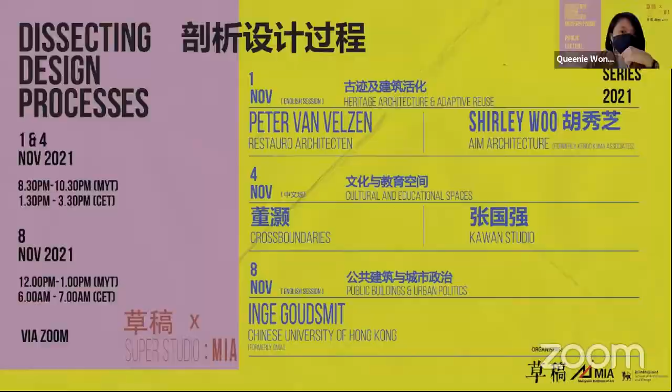This public lecture series is brought to you by Malaysian Institute of Art and Draf. Malaysian Institute of Art is a non-profit making organization, and we at the Interior Design Department offer the Bachelor of Arts Interior Architecture and Design program, with the syllabus adopted from our partner university, Birmingham City University. We aim to provide students with the skills to transform or give life to new spaces. For example, this semester in our studio, our students have to work on an existing warehouse, Kongsi KL, and transform it into a performing arts space.

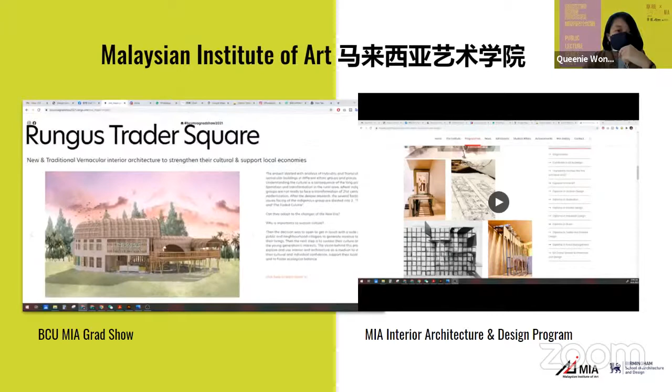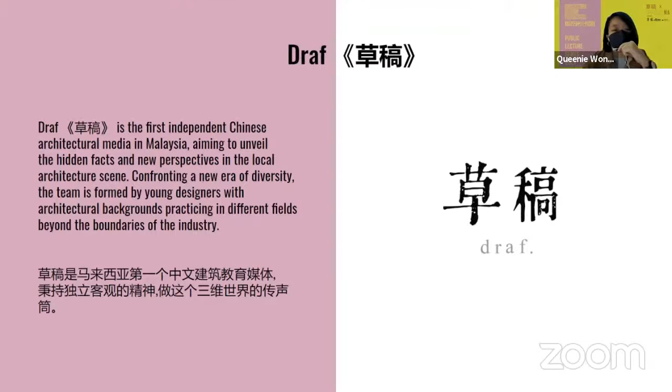We also have Draf, which calls itself the first independent Chinese architectural media in Malaysia. Among other things, including events and activities or public lecture series like this one, Draf is also going to publish their first publication. The debut issue will be titled Tatsulai, which means stepping out. It covers topics including how architects step out of the boundaries of their discipline into different disciplines to address issues like the pandemic or the climate crisis, etc. It also covers how people step out into the public realm to voice their concerns, and how communities step out into the communal realm to organize spaces by themselves. If you're interested in what Draf is doing, you can log on to their website, which will also be in the chat box, to check out their events, the content of the debut issue, and also place your order on the website.

Moving on to the title of our public lecture series, the reason why we are fascinated by the design process is because we think we are being more and more exposed to fragmented information about architecture on the internet. So we hope that through this lecture series, we can shift the spotlight from picture-perfect outcomes to the exploration and experimentation that led to the decision-making process behind the creation of our built environment.

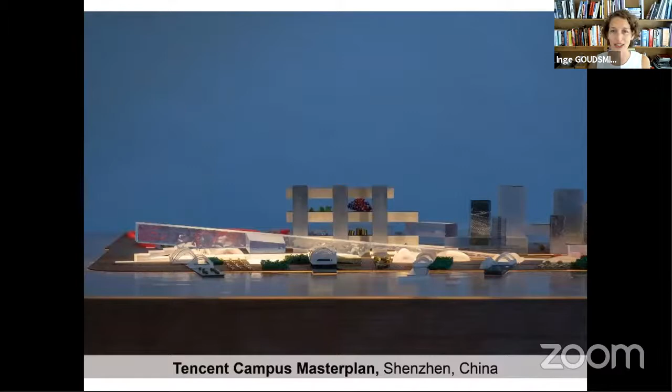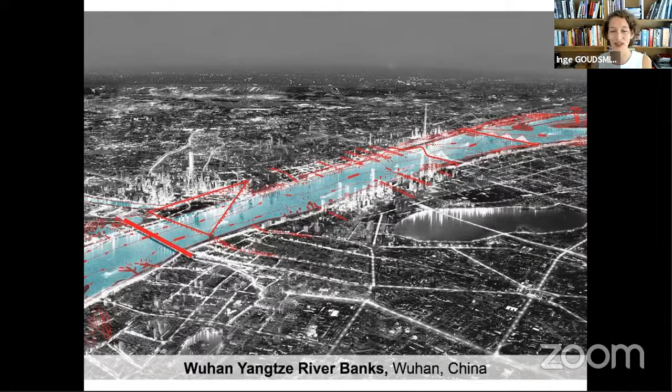I also worked on the Taipei Performing Arts Center as a key project, but other projects include the renovation of the Ullens Center for Contemporary Art in Beijing, one of the major art centers, and a master plan for Tencent for 80,000 staff and 20,000 residents here in Shenzhen. Unicorn Island, also another master plan in Chengdu. The riverbanks of the Wuhan Yangtze River, before the whole COVID thing happened - I actually went there quite a few times.

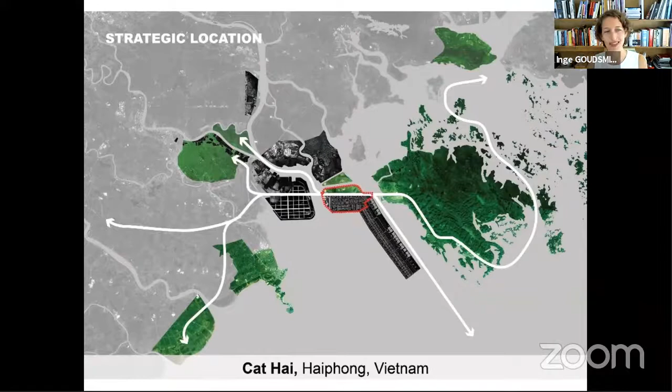Projects in Vietnam too. I was very interested in the politics around these projects, also in the design of course, but also how much you need to know as an architect to make these projects happen, which is in fact much more than good design. Good design is essential, but there's so much politics, especially in larger master plans, which is why I enjoyed master plans a lot. That's the reason I started teaching, and here I teach the Urban Politics Studio, where we try to address these kinds of issues - looking at much more than design. That has led so far to quite a few very interesting results, which you're welcome to check on our website, currently being updated.

Again, Taipei Performing Arts Center - let's talk about that project today. What I will show you is quite a range of slides. I have quite a few.

Because the project has been, we started the competition in 2009, or won the competition in 2009 I should say, and since then a lot has happened. So now we're about to complete it with quite a few years of delay that I had never expected it would take so long. So I want to show you a bit of the design and a bit of the current state, and I've thrown in a few special moments about the more interior part of the design, because I know a lot of you are potentially also interested in that.

So let me start with the site area. Can you see my mouse if I move it like this? So this is actually the site area, which is the metro line, the Jiantan station. It's in the north of Taipei in the Shilin area.

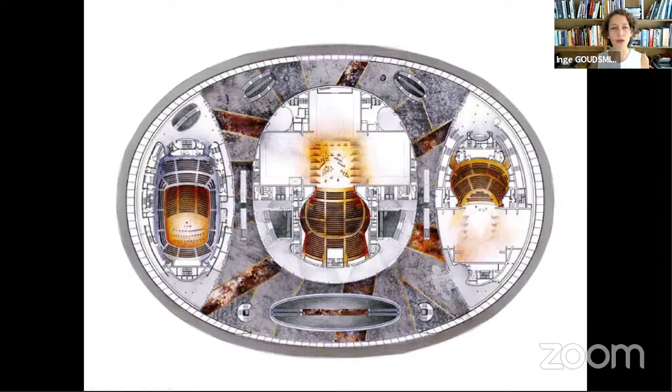So we thought, if we have those three theaters, we should really try to benefit as much as we can from that combination of theaters, which is quite an exciting program. So we took reference to this hot pot, a Taiwanese hot pot, as a diagram of consolidation and efficiency, where three dishes are cooked in one pot. Can we, with our program of three theaters, combine and be highly efficient about this space?

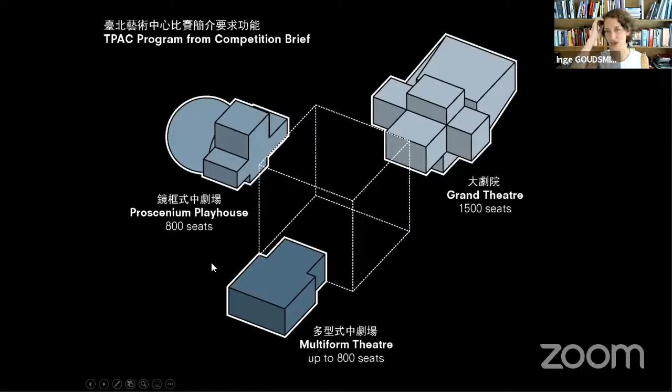So this is the program brief: three different theaters. The Grand Theater with 1,500 seats, a proscenium playhouse with 800 seats, and a multiform theater with another 800 seats maximum. We consolidated those three theaters basically into a sort of stage tower, which is a very efficient back of house tower. Then those volumes that are sticking out of the cube are the auditoriums.

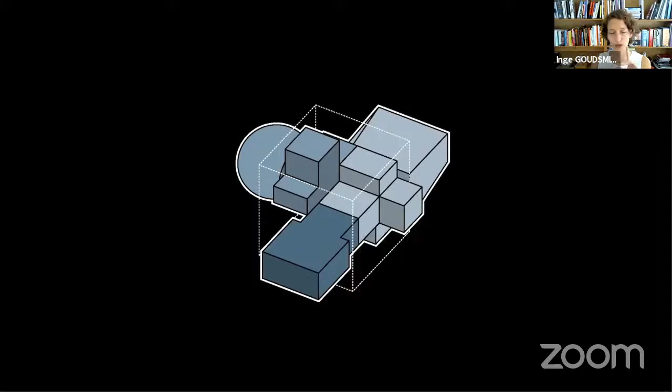With this, we tried to create much higher value and also flexibility, and we tried to reduce the redundancy of those multiple back of house areas, and in fact multiple front of house areas, because this way you can combine the entrance area to the theater. So it results in a very compact theater that also leaves as much space on the ground as possible. I'll tell you a little bit more about that in a minute. So this is then that image.

So this cube, we wanted to make it a very highly visual cube where you can see through, see the machine in operation, and then those auditorium volumes that are really a bit mysterious, where you cannot understand what's happening inside. So it looks very different from most theaters, which are usually quite opaque volumes.

We think that life on the site is actually really exciting. The government occasionally thinks otherwise, because they're concerned about dirt and messiness, so they'd like to control the food market and those vendors better. But I won't tell you too much about that today, that's not the topic. I'm quite interested in the combination between the local culture, which is really very strong, and the high culture implemented as a global icon placed in this local neighborhood, and how these two areas clash.

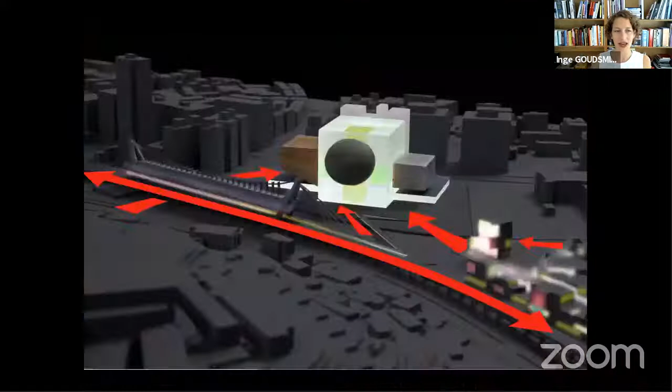So what we try to do is open up the site in order to connect to and give space to this local culture. That's why we lifted up the building. As I mentioned, initially we had a food market, this wider lower strip. But unfortunately this was taken away by the government after a couple of months into our design exercise, because they had fears about managing dirt and smell into the theater, and the combination of high culture and local culture which they thought was quite difficult to match.

This has been a struggle throughout, which is actually part of the PhD I'm working on, looking into that kind of struggle. Nevertheless, by reducing the site area as much as possible, there will be a lot of area for other activities, whether related to theater or food, we'll have to see. Eventually, as architects, we don't have control over that.

So definitely it will be a new attractor in this very dense urban energy, attracting probably different kinds of people. Everybody hopes it will help save the night market once tourists come back, because the night market is really in a very poor state because of COVID and also some other problems they had even before.

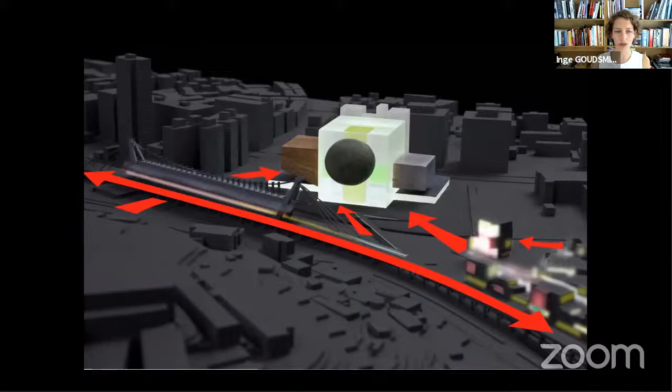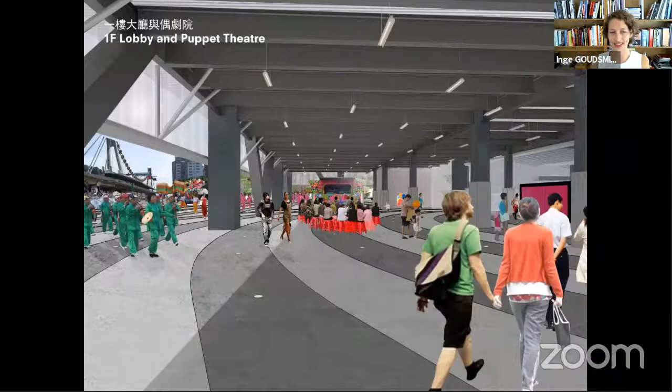And also here, these areas are where the auditoriums are protruding. So there's a lot of shaded, covered area of the site that is yet part of the realm of the theater. And then at some point you go inside the theater, which should potentially be open the entire day, so accessible for anybody.

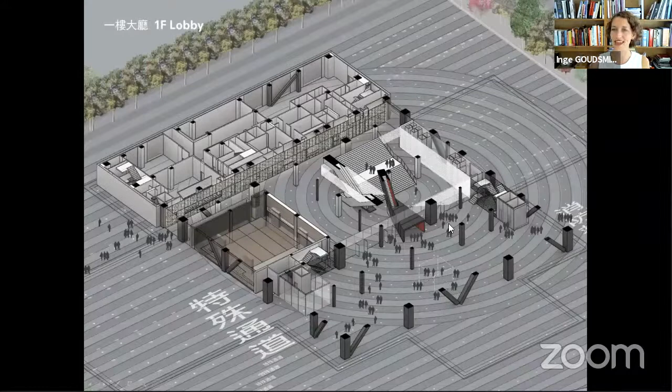And at some point you start to go up into the theater with this kind of big staircase. Step by step you enter into the realm of the theater, and the materials also get more and more advanced.

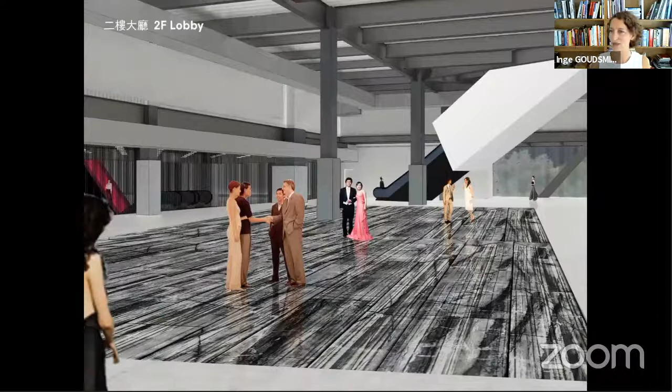So this is the second floor, which is the main lobby, mostly used for visitors. This is probably not a ticketed area necessarily, but an area general visitors won't visit much because it's simply a sort of pass-through type of space.

And then from that lobby, you basically start entering. This is the picture I showed just now, and you start entering the different theaters. So it's really the main zone before you start going up to the theater.

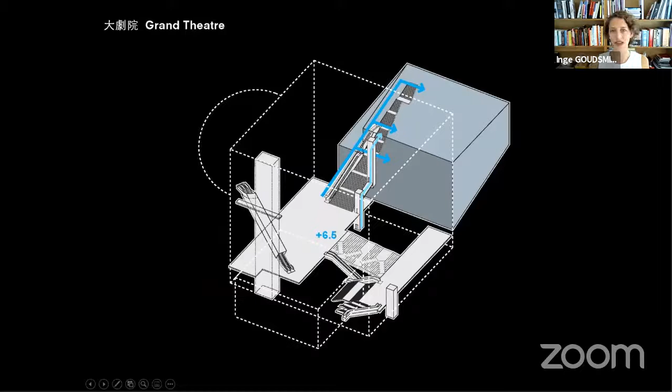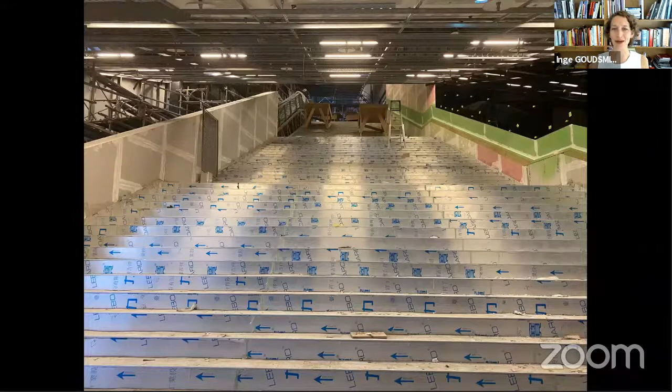The first one is the Grand Theater, the largest with 1,500 seats, where you enter via this staircase. Rem Koolhaas, during a site visit, once mentioned this must be the longest staircase in the history of architecture, or at least it should have that effect, because it tapers all the way up, becoming narrower and narrower, until eventually you have a very, very small slit.

Of course, you don't only have to walk—there are also escalators taking you up, and at the end of the show, taking you down. But it's quite an expressive, interesting space.

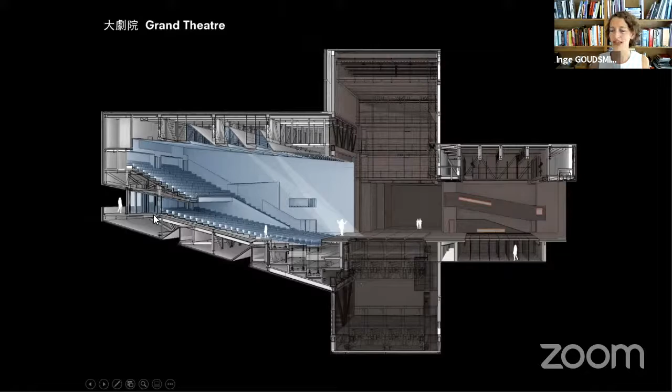The interior of that Grand Theater has basically two floors, and one of the floors is connected—because we didn't want to have two separate balconies and a main floor, but by creating that combination we ensured the two levels are really connected to each other. Here you see the section, and it makes it into a very intimate feeling, so even though it's 1,500 seats, you still feel very close to the stage.

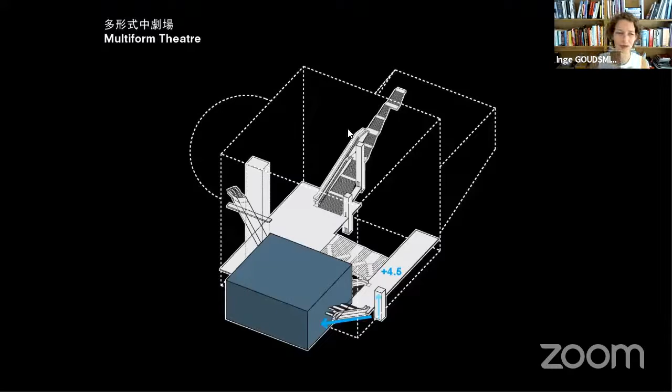But first, the multiform theater, which is on the other side of the cube. This is a multiform theater, meaning there are a lot of different configurations possible. You see the interior of the theater with the technical grid at the top and a functional space with some understage underneath.

But then you see this space, which is the lobby. Initially our lobby was only here, and we didn't include this space underneath, which was the realm of the MEP engineers at the time. But then we realized they didn't quite need all that space, and that we could take some of it back, benefiting from a slightly larger lobby for this multiform theater.

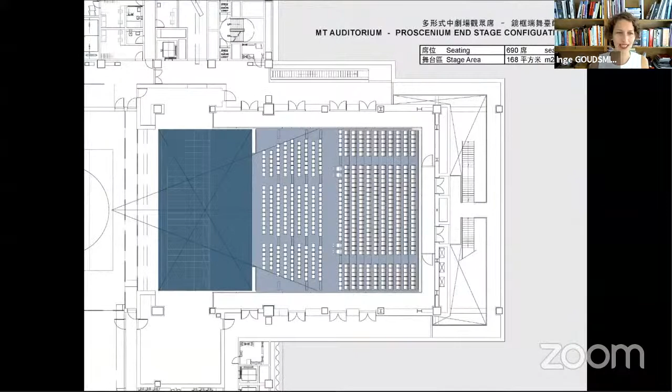This is the plan with some different configurations, and the current situation where the theater is blue, but a different tone of blue, a darker color, because for the multiform theater the client wanted it darker, to make it slightly more similar to a black box.

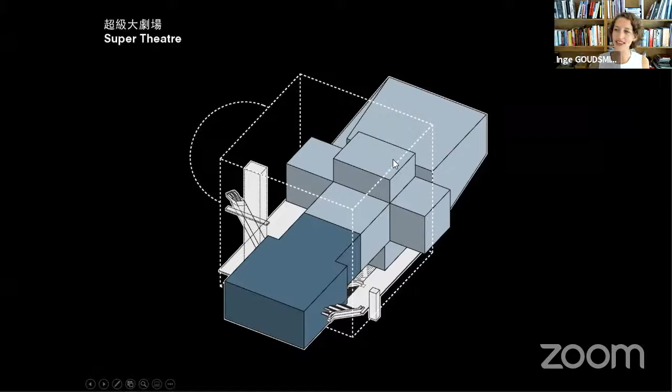There's a big story about that, and I'll show you one slide later to go into more detail. But most interesting about these two theaters is that we can actually combine them. Sometimes I call this '1 and 1 is 3.' So instead of two separate theaters, this would be the grand theater realm with a stage tower, understage, auditorium, backstage, and main stage.

And this would be the multiform theater. But we can combine those stages together and create a 100-meter long area from this side all the way to that side, in which you can imagine completely new types of performances. As I know you guys are also designing a theater, this could be very interesting to consider, how you can create something new rather than a conventional theater.

We sometimes show the reference of the opera Die Soldaten, which needs a lot of space and can currently only be performed in factory halls. But we also thought it was interesting to address different types of shows. Honestly, in Taiwan there's a very high level of theater, very high quality, so it was interesting for us to address that interest.

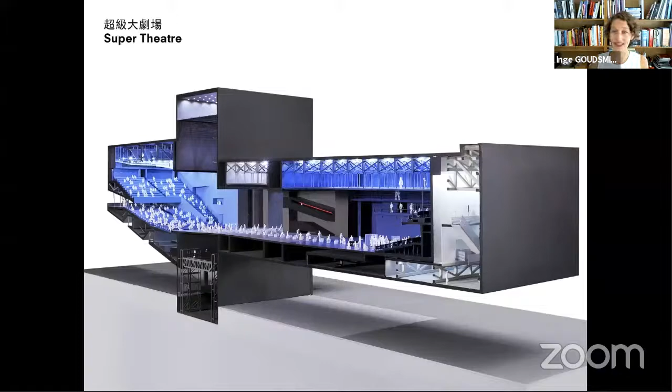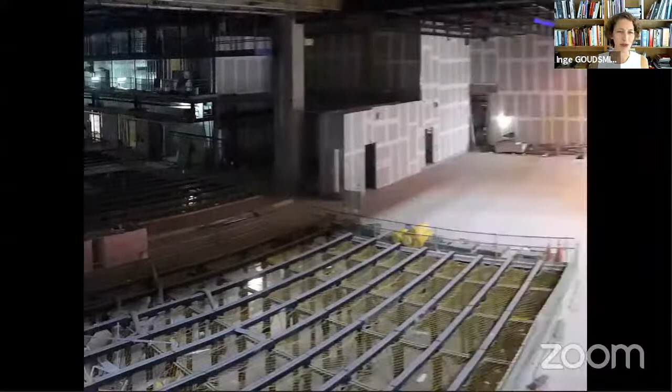So this is a few views of how that space works. Here you see from the multiform theater, the backstages, and then all the way to the grand theater, that 100-meter long space under construction, which sometimes we feel we should not build any walls anymore because it's so exciting to have that empty space rather than full spaces.

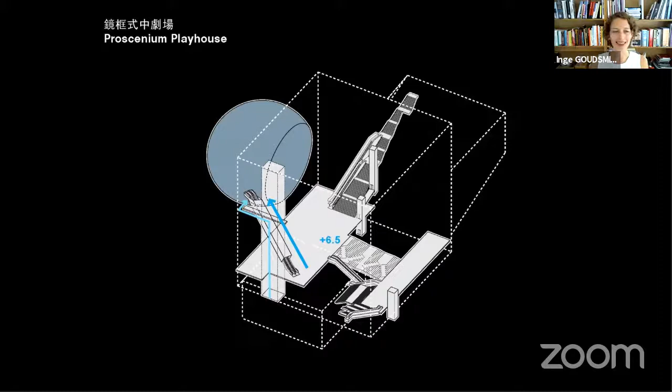The last theater, Proscenium Playhouse, is the big ball, as most people understand it. Again, you enter from that lobby area into basically a big tube by long escalators. In reality, these escalators look much better than in the renders. You must realize the renders are about 10 years old, and 10 years ago the quality was just a little bit different.

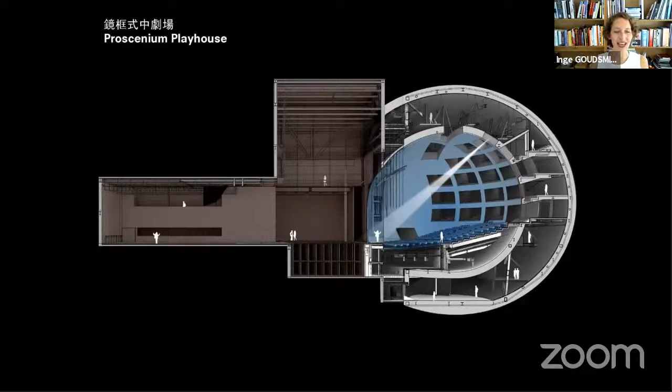That's something we didn't realize at the time, but looking back, some of them look a little bit boring, right? So here you see the section through that space, the interior ball, and then an exterior ball. In between those two volumes, you have the moment where that entails the lobby at the bottom and the circulation spaces where you move to your seats in the different boxes on higher levels.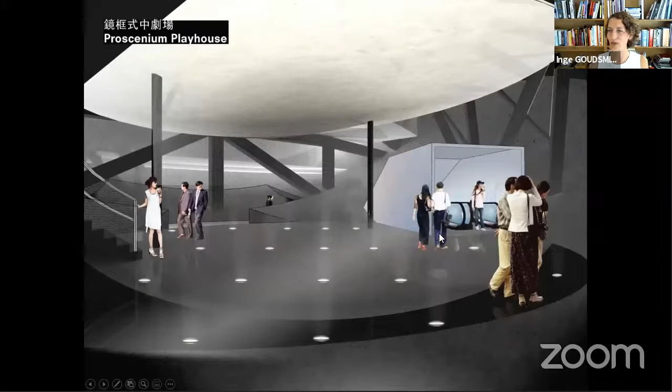So this is that lobby area where this is where the tube comes out. This is the actual situation where you see the underbelly, the soffit of the auditorium. It's a really sexy space—you don't quite understand how it works when you stand inside, but it's an inviting space to walk up those big staircases.

And this is how you circulate. Some work still needs to be done in those spaces, but it will always be quite dark because there's no daylight until you eventually enter the theater.

So this is the theater plan with 800 seats, a render, and the current existing situation. And at some point we started unpacking those seats. We built the proscenium also as a circular opening, for which we had to fight a lot.

It's not a standard proscenium. We're actually designing special curtains to match this proscenium, so we can really play it out and make the most of it. Here, those black areas are the official proscenium opening that can open up in different ways. I'm not sure if you guys have a proscenium theater inside your stage, but this is a reference to understand it.

And you see here the seats are finally uncovered, and another view from one of the boxes. The seats we actually designed from scratch. These are just 16 of the design versions—we had many, many more.

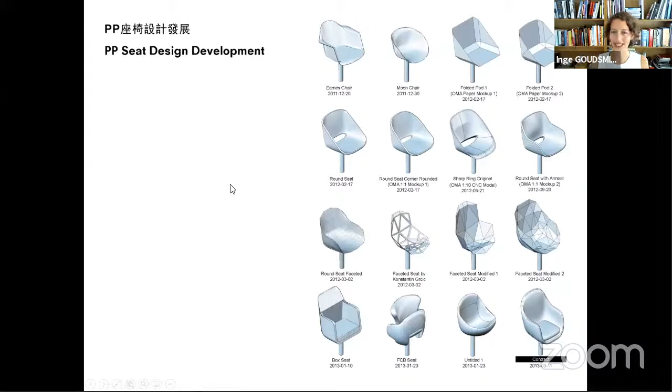We discovered through this very long process that we needed a sliding mechanism because we didn't want a folding seat—otherwise you don't have enough egress width for fire safety, etc. A theater is a very highly technical space.

Eventually we were very happy that these seats are there. I must say they are actually quite comfortable, more so for Asian people who tend to be slightly less wide than some Westerners, because they are not extremely wide—but this was really the max we could do in so many different ways. It was a really exciting experience to work with those seats.

Something about the material—you must have noticed that all the theaters are completely blue. This picture was actually one of the references we used. We thought it was really exciting that this boat, by Xavier Veilhan, is entirely blue except for a few very technical things that are either black or white. Everything about it is blue, of course, so we thought this could be very exciting.

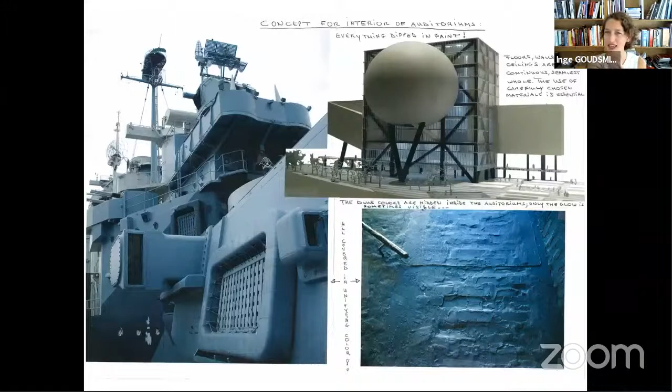We started looking for references—marine boats and submarines that have a similar quality, but also this layer of material. Instead of using a top layer, we really tried to have the idea of everything coated in a very thick coating of the same color. Initially we proposed 3 different colors for the 3 different theaters, 3 different shades, and also different textures that we wanted to explore.

From a very lush look in the Grand Theater, to the Ball Theater with this kind of thick coat that could be applied on the ball, and eventually a darker color for the MT, the multiform theater. We did a lot of tests.

Some of the colors were too desaturated, some were too innocent, some were too political—which, if you know a little bit about Taiwan, is extremely important. Then we had a lot of discussions with our client and the theater performers, who were very afraid that this color would be too light or too dark, too innocent or too political, or something else.

So we had to actually make a mock-up in one of the local theaters in Taipei, where I literally traveled from Hong Kong with about 800 meters of fabric that we installed in the theater. We held an event and invited the entire theater elite of Taiwan, and eventually the colors were approved, to our big happiness. But it was a very long process.

So again, I mentioned urban politics—you can design something, you can come up with something, that's one thing, but to actually make it work is a whole different thing. Even down to the color, as I wanted to show, things can be extremely political.

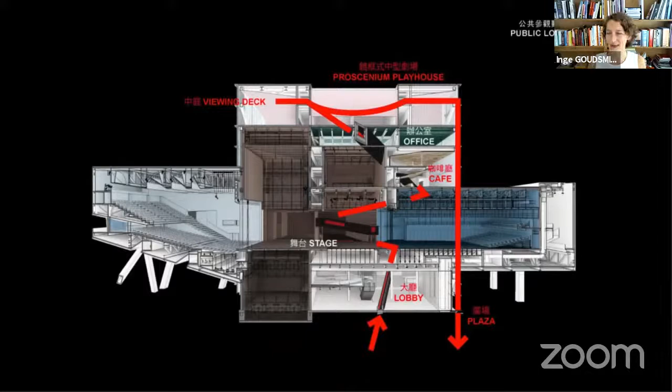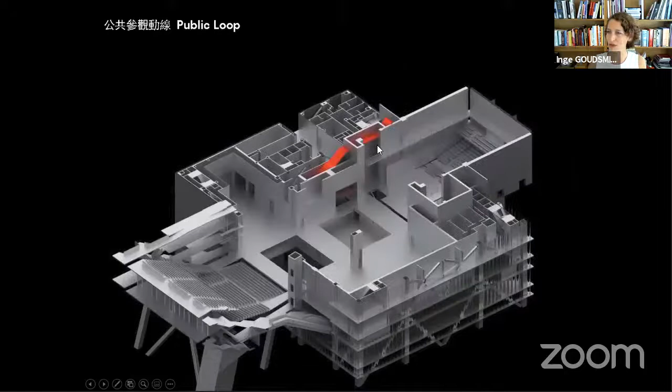So we managed to find space through the nooks and crannies of the building, starting from the lobby with its own entrance from outside, separate from the theater, going up behind the back-of-house areas, peeking into some of the stage areas, and into the technical grid of the multiform theater, further up through the offices, through a courtyard, and to this public space that is a viewing deck accessible to everybody. It's a great outdoor space with a beautiful view.

A last view through the proscenium playhouse where you can see onto the stage, and then you would go back by elevator from here. Again, this is the render, and fortunately, the real situation is much more exciting than that.

Of course it's still in process, but it's a really exciting space. I was talking recently to a local social activist who had her doubts about the application of this building and how well it would suit local people. But she called this space - she had picked up on it already - she said there's this tiny alley that really reminds me of the local alleys of Taipei's back-of-house spaces, Taipei's little alleys.

And she called it the tiny alley that goes through the entire corridor. I really hope that this will be a space opened to the public, not only used for guided tours, hopefully also not paid. But of course the client is eventually in charge, and as architects we can come up with ideas and propose things, and then we need to see how things work out and if it works at all.

So this is the big public loop escalator that goes through the auditorium, and this is basically an image that we made very early on, where we wanted to have that view of the back-of-house areas, where you can sort of see what's happening.

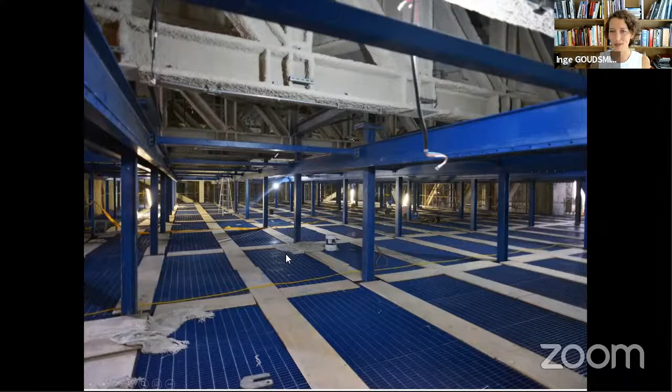This is the view to the MT technical grid - a space that most people have never seen before in their lives, right?

Then the public loop leads up to this cafe on the 7th floor. The cafe is open to visitors, to everybody in the public loop, but also to the theater performers and to the people who work in the building - which is actually a very large amount of people, often forgotten. If you think of theater, you think of performers and audience, but there are hundreds of people who work in the building and can also have their lunch here.

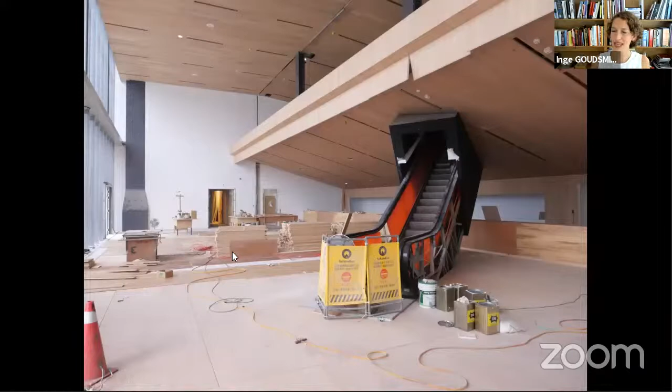So we really hope this will be a space where people can meet formally or informally. This is the interior as it is at the current stage. There's a large terrace that you can also access, and again, the planting is in progress.

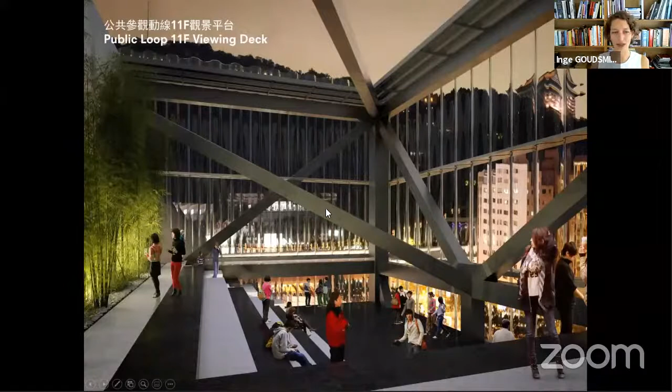And this is then that viewing deck that I mentioned earlier, all the way on top. Again, the current image looks a little bit better than the render, fortunately. It's a very exciting space that also has a lot of structure that we needed to accommodate.

And then there's this view of the Grand Hotel, which is really one of the major touristic spaces or important cultural spaces in this area, and can only be seen from a certain height. So we're quite excited that you can actually have this view. To be really honest, we did not know that we would have this view - we always photoshopped it into the initial renders.

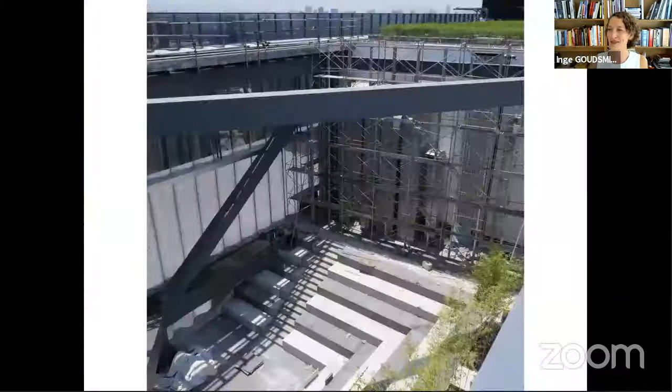You see it here, but we had no clue from which angle you would see it. So we were very happy once the space was stopped out that we could actually see the hotel. It was a big luck in a way. Sometimes you have to have some luck.

And this is the view from the public loop, the viewing deck, into the Performing Arts Center, the big ball into that space. And here is the current situation.

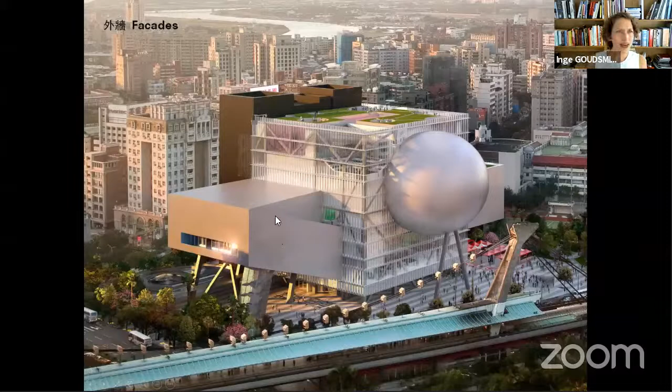Do I still have time to talk? Maybe I quickly go through a few facade slides. Yep, there's time. Yeah, okay.

Facades are, of course, a project in and of itself, like the chairs were that, and the interiors were that. We have basically three major types of facades: the glass cube, which we wanted to show what is happening inside the technical building, then aluminum facades on the auditoriums, and the back-of-house west towers that have a lot of back-of-house areas.

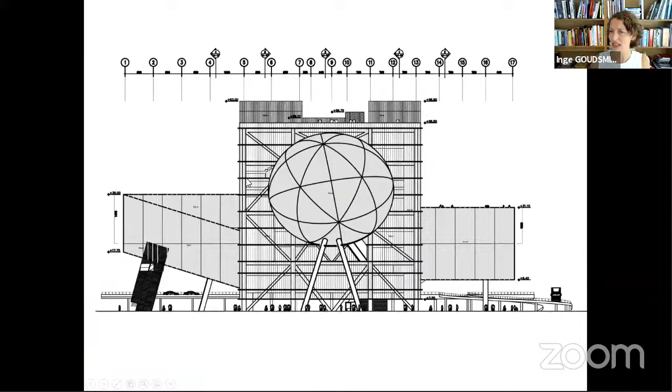These are mock-ups, and Queenie asked me if I could show some of the mock-ups. Well, these mock-ups are almost complete buildings, right? They have their own drawing set, and they're extremely large, I think 50 meters high or something, where we tested all the essential points of the different facades.

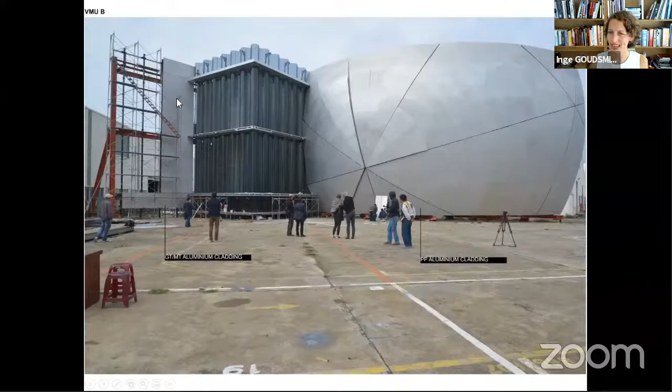So of course we had to test the ball, and especially how the joints would come together, the glass facade, and also how the ball and the glass facade connect, and then the straight flat aluminum facade. We had numerous meetings.

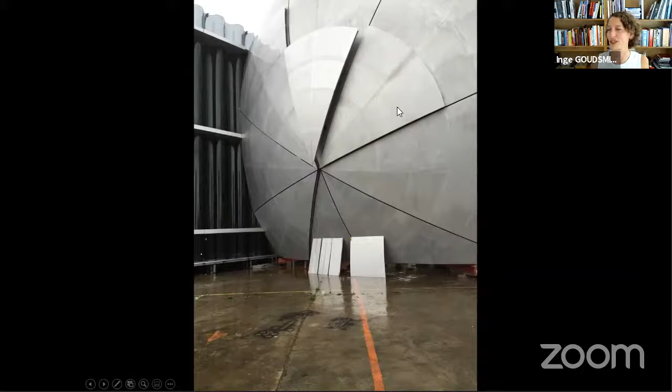This was on a different site somewhere far away, where we had an endless amount of tests. We had fire people coming in to make the building wet so we could see it. We had to come in sunny weather so we could see if it would shine too much. We had maybe 8 different versions because we constantly didn't approve on the different joints, etc. So it was a huge technical process, but eventually it paid off.

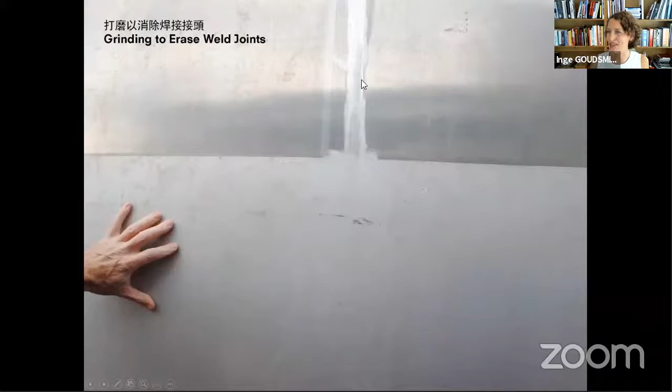And these are some of the mock-up pictures. We had to decide whether it's shiny or matte, how exactly we grind the welds, etc. I won't go into too much detail.

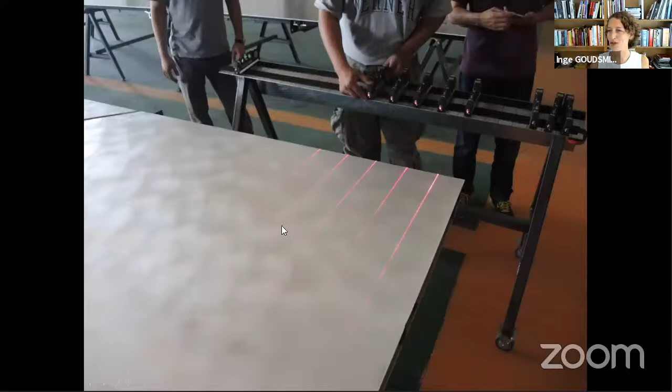Eventually the flat panels were all hand grinded, as you see here, literally people with hand grinding machines that made these patterns, because we wanted to make them as lively as possible. Unlike, for example, the Apple facades that are very, very matte, very constant, we wanted to create this kind of life. So here you see the hand grinding of all those machines in a particular pattern. We had to educate those craftsmen to actually do it in the way that we envisioned it.

So this is a view of the theater itself. What we did not expect was that halfway through the construction of this ball, our contractor went bankrupt and the site was closed for 2 years. Now you can imagine that had an enormous impact and was actually really scary for us.

This is something you can never envision. You can design perfectly, but I remember we said, well, it's a difficult process, but they just need to do their best. And then your site closes for 2 years, and just doing your best is no longer an option, because nobody is getting paid. So those were hard times for the theater.

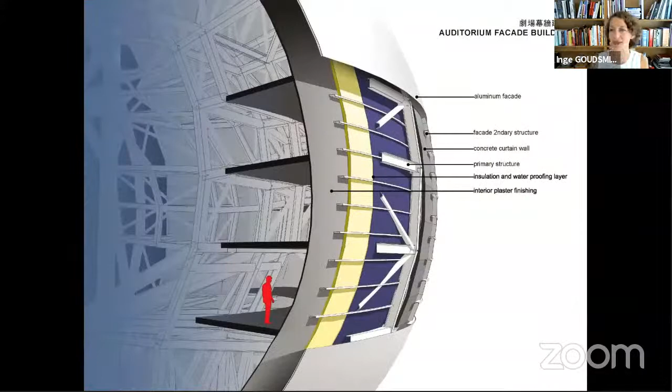I won't go into too much detail, but just a few pictures of what it looks like. You see the overall bigger joints, and the smaller joints welded together, and how it comes together. Eventually, I believe it worked out pretty well, knowing that some of these panels are 17 by 13 by 8 meters or something like that. They're enormous, so it's not so easy to get them perfectly in shape.

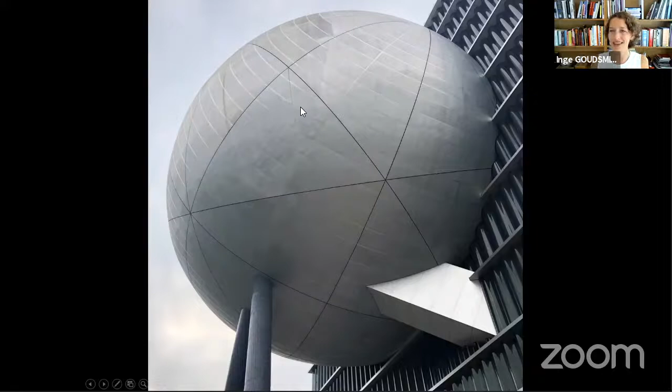Nothing is perfect, and it's never meant to be perfect. You see some of those lines which were of course not part of our design, but you sometimes have to accept the way it came out, and we are at least quite excited.

We have corrugated glass. The big benefit of corrugated glass is that you don't need mullions, because the glass can basically stand by itself, right? If you consider a flat piece of paper, of course it cannot stand, but if you fold it, then suddenly it has the strength to stand by itself.

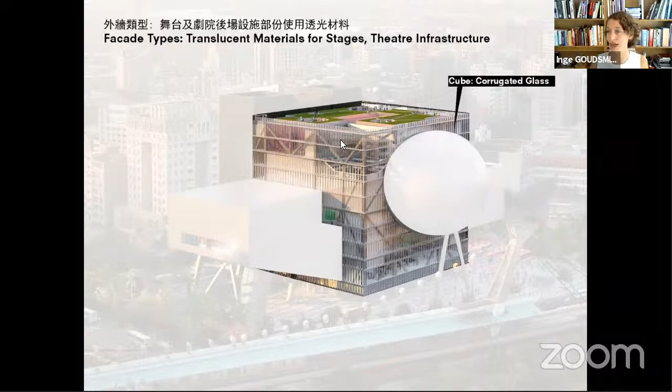And that means it's much more transparent than it would be if you have mullions. So we had this glass, it's actually made in Spain and shipped to the site. And it gives this very interesting effect, both from outside and also if you look through the glass.

We always joked that this glass made Taiwan look a little bit more like Hong Kong, with suddenly you have all those pencil towers and the hills in the background. But it's a very exciting kind of effect that really changes the perspective on the city.

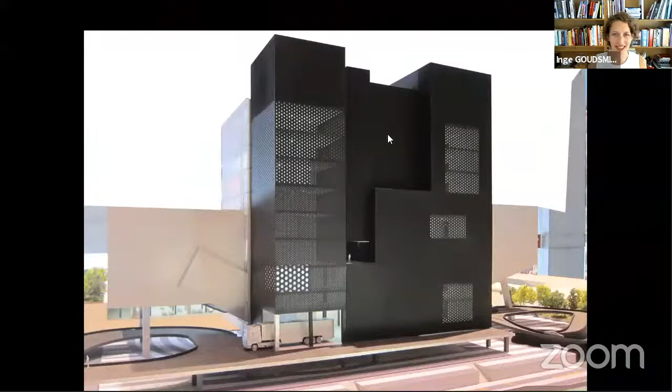Lastly, the back of house areas. This is the model that actually decided how we wanted to perforate these different buildings. You see different types, different sizes of perforations, which reflect the different functions inside.

The larger ones are sort of social functions. There's dressing rooms and office functions that all require a different amount of light. And then there's the closed functions, the closed panels, which are lifts or other back of house areas that don't require any light.

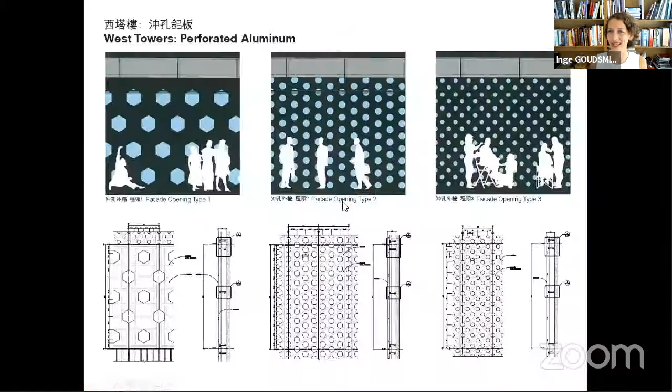So we had those different kinds of perforations, and we decided to literally take this model because we tested so many different things, and eventually this model is what we liked. So the current building looks exactly the same as this model. Again, you have to be a bit lucky that at some point you hit the right spot and you're happy with the kind of design that comes out.

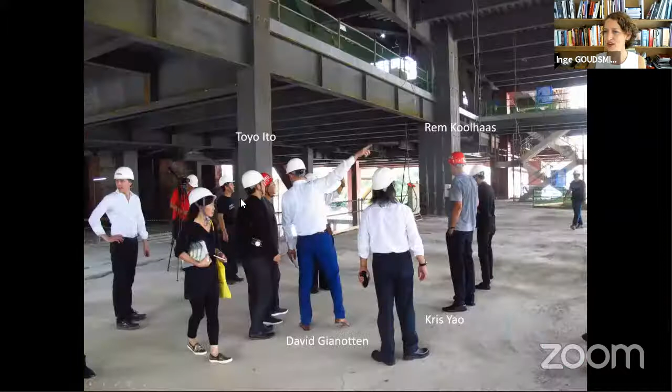We had several site visits. At some point, Toyo Ito, who I'm sure you're aware did the other theater in a different city in Taiwan, came to our site. We all went to see his site, which was really fun to compare the different areas.

The opening will most likely, but I never dare to say that it will happen, I hope that it will happen next summer, July 2022, with probably a month of celebrations. And after that, the real shows will start. As you can probably imagine, I really hope that I can go there because after working on this project for 12 years, I'm very curious to see the final results with my own eyes, as we say. Thank you so much.

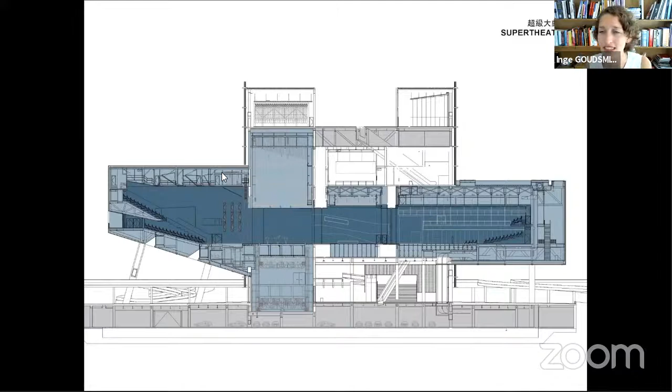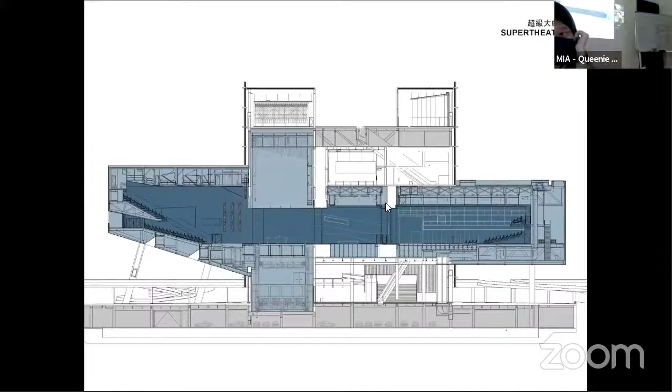And the sound of a helicopter is about 115 to 125 dB, which is about the loudest noise you can imagine because it's a very low tone. You want to be able to show Miss Saigon in this hall while at the same time performing another show in the multiform theater. That means there needs to be at least a double layer of very high quality sliding doors in between.

With those sliding doors, we took it as a challenge to make different configurations possible. You see these dashed lines, those are the different locations where those sliding walls can go. So instead of only having one configuration for this auditorium, you can also extend it up to here, and you can even make it into an L shape. That would give you a completely new type of theater, a much different experience for that multiform theater.

And the same with the Grand Theater, where you can actually have a very large backstage if so required, plus you can have a sort of theater in the round if you combine all these backstage areas. So it gives us a lot of flexibility. We'll see how it works out, because we know this is a big challenge, and for sure there will be questions at some point that come back.

The acoustic tests are happening as we speak, in these couple of weeks. There's been acoustic tests before, but the problem with acoustics is you can only test once the project is basically finished, because otherwise there would be so much structural leakage it wouldn't make sense anyway. And once the project is finished, it's very difficult to access areas, or even see areas, that might have issues. For example, if connections that are supposed to be disconnected from each other, with rubber in between, are still for some reason connected, if there's a mistake, it's almost impossible to find.

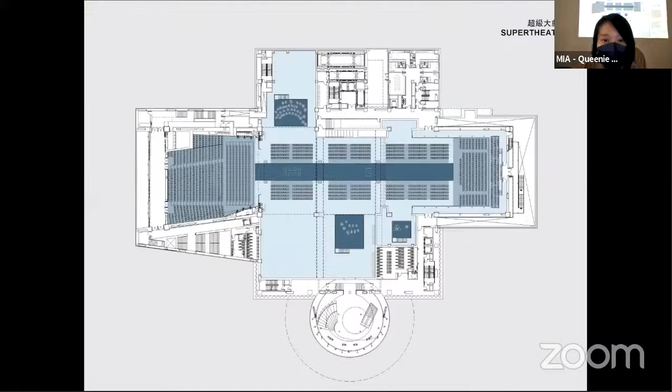Let me quickly share the screen to show you how we implemented this. So you see that this is basically the main back of house corridor with a width of 5 meters, which is very generous. It means that you can also have some space for storage of materials, of technologies and technical stuff. So we carved out...

This is where you come from below, from the 3rd floor. You walk up, this is a staircase. You walk in here and you go further up. And that means that the space underneath this public loop, because this is a 5 meter high corridor, the space between the public loop that goes on top and the space underneath can be used as a storage area that's about 2.5 meters high, which is enough for a storage space.

So we really carved out spaces, and we made a metal mesh in this area so that you can actually see the performers walking around. And maybe you can see there's a little window here that looks onto the stage as you walk up. And if you walk another round, there's a window above here where you can look into the back or the side stage.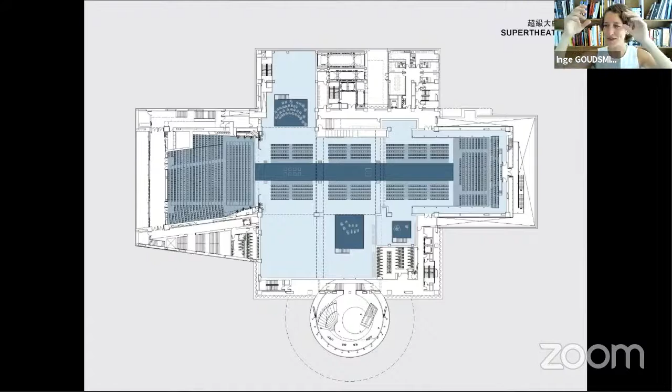You may know that in the CCTV building in Beijing, we also have a public loop that is entirely closed to the audience. And Steven Holl in Beijing also has the Linked Hybrid, which is supposed to be a public space with all these kinds of public facilities, but it's closed off for the public and only accessible for the local residents. That makes those spaces not viable to be used by the larger public.

So it's always really important to consider who's the client. Beautiful ideas are great, but then how can it really work out? Is the client open to operating it in the way that you envision? If not, then it might be a bit of a waste of your space, your time, and your money.

Yeah, I really do hope that it works out. Yeah, me too. So yeah, especially since the lady called it a tiny alley. That's for me, that was a sort of like, wow.